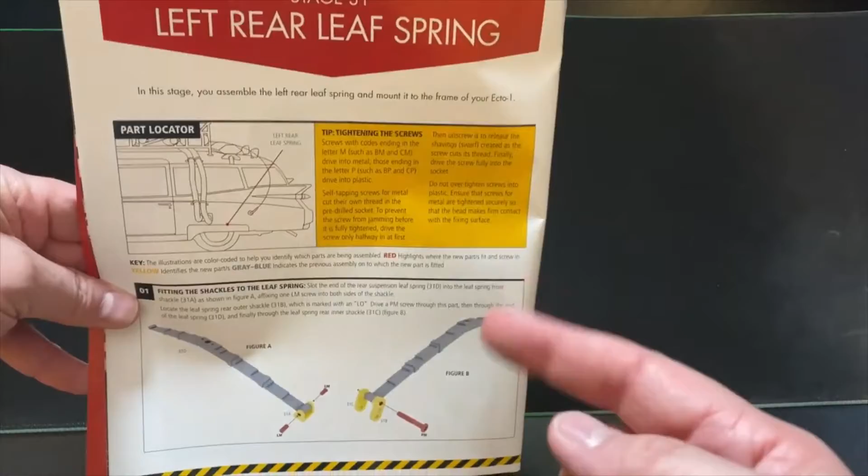We have our parts kit right there, and we are going to be working with stage 31, the left rear leaf spring. This leaf spring is metal, so that's really cool, it has some weight to it. I can't wait to see how much this whole car actually weighs - it's incredible how much so far.

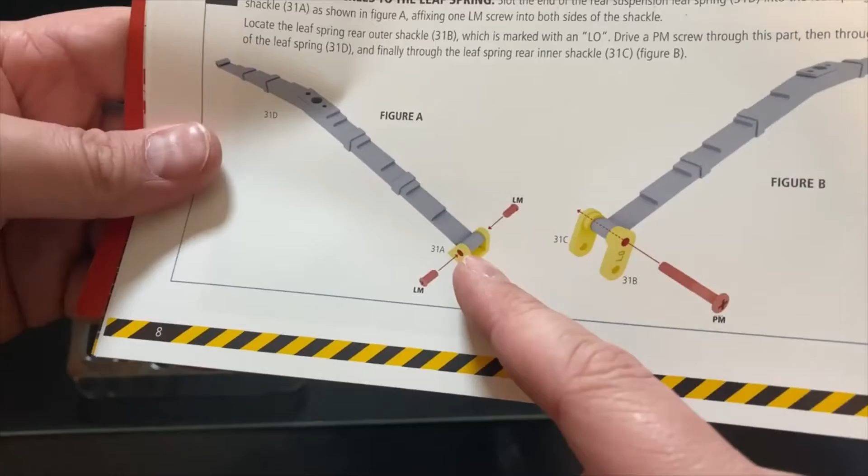So our rear leaf spring, we're going to start off right here with our shackles. We have the shackle, and then you're going to use LM to push through, and then on the opposite side it's going to be a PM screw. So we're going to get these shackles on real quick and show you the results.

All right guys, there we go. We have the shackles attached to the leaf spring itself right here. We have this side and this side all done. This is one long bolt that goes through here and kind of swivels a little bit, and then this side you have two. So that is done.

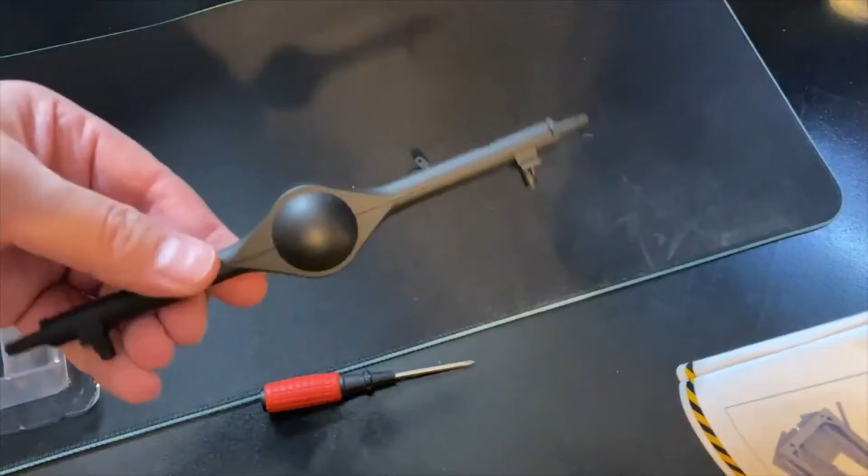We will move on to the next step, which is attaching the leaf springs to the rear axle itself. So we're going to take that and attach it to our axle, and we'll knock that out right now.

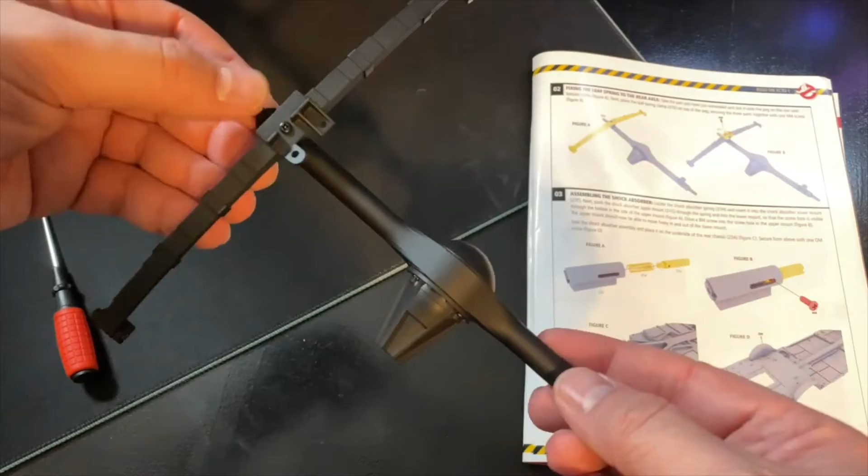All right guys, there we go. We have this attached to the axle itself. And there is a little bracket right here that goes on over top of your leaf spring and then gets screwed right on there with one NM screw. So that side is all done.

Now it looks like we are going to be assembling the shock absorber, the rear shock absorber. So we're going to do this real quick - take figure A, which is this piece right here, and then there's also a few springs and a plunger right there that we are going to attach with BM. Once that's done, attach it to the underneath of the car on this side, and we're going to attach it with QM, and we'll get that knocked out real quick.

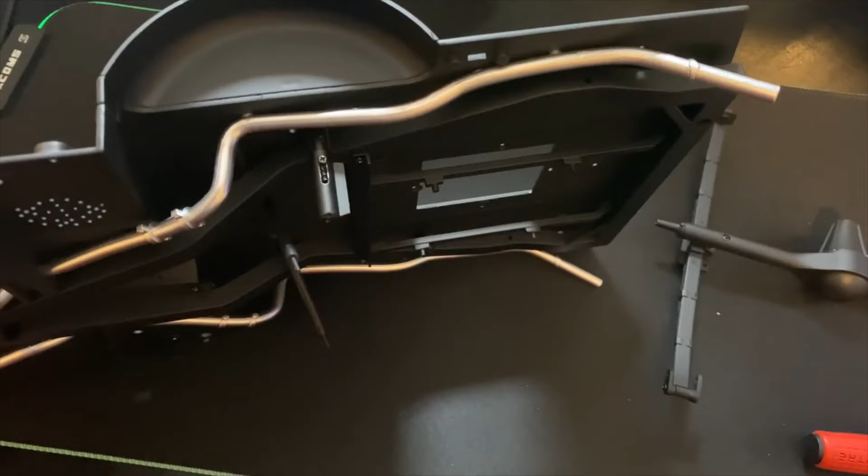All right guys, so I have our car on its side and our shock absorber is on right here, and there is one screw up top right here, if I can show you, right there. That's where your screw goes for that, and that is all done.

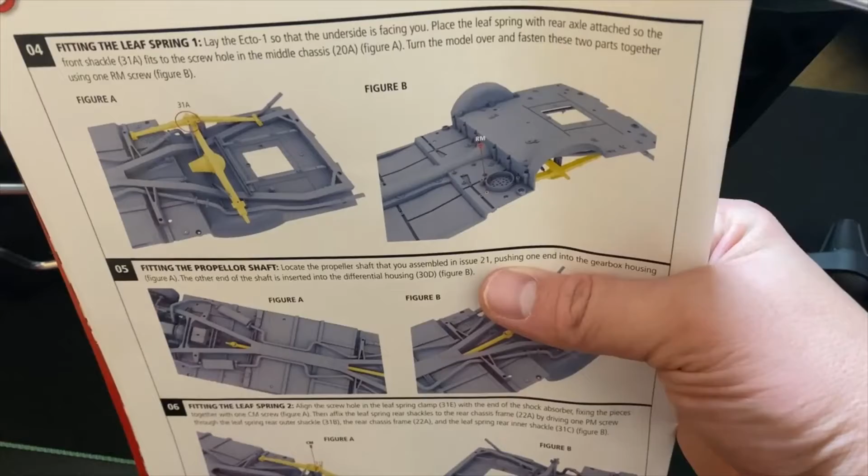Now that that is on, we're moving on to the next section, and it is going to be attaching the leaf spring itself to the actual car. So we're going to get it attached real quick, and then it looks like it is held on with an RM screw on one side, holding it down. Then down here, we are going to be attaching the propeller shaft.

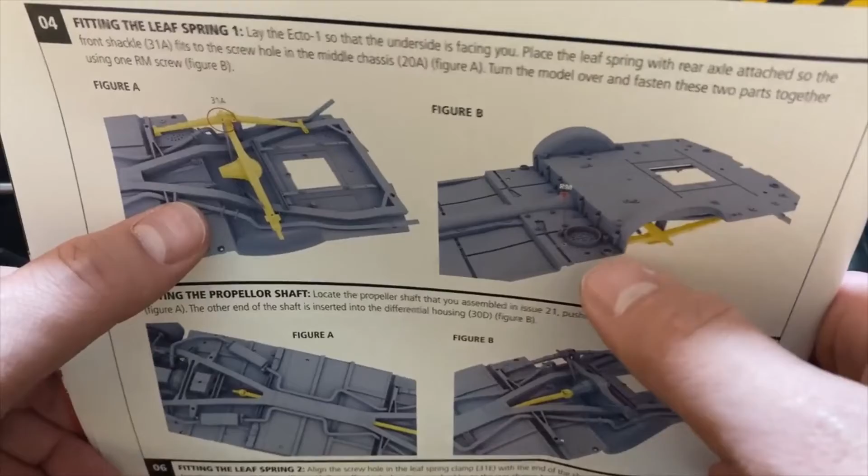So first off, let's get this rear axle attached to the car and go from there. All right guys, there we go.

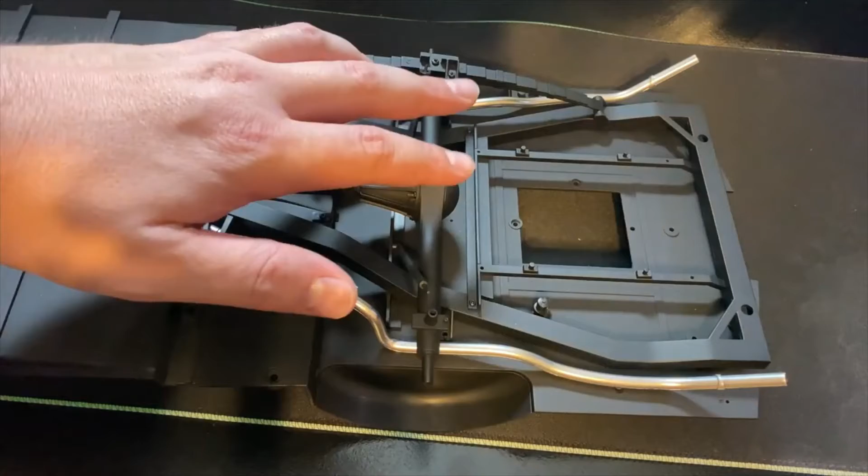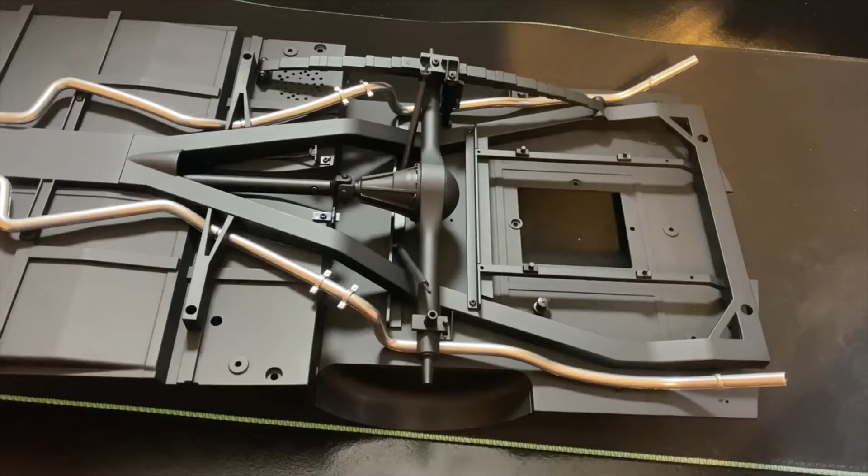We have our rear suspension attached to the car with our leaf spring. So I'll show you exactly what all we've done, because it seems like we've done a lot, since I didn't want to mess with it. Starting up here, you have one screw that holds the shock absorber to the actual suspension itself - that piece. Then underneath you have PM, which holds the shackle from the leaf spring. So we have that attached right here and here.

And then you are also going to be fitting in your drive shaft from a few boxes back. You're finally using your drive shaft, so it's going to go in, and you may need to adjust it a little bit. What I did was I pulled it out, slid it in, and it fit perfect.

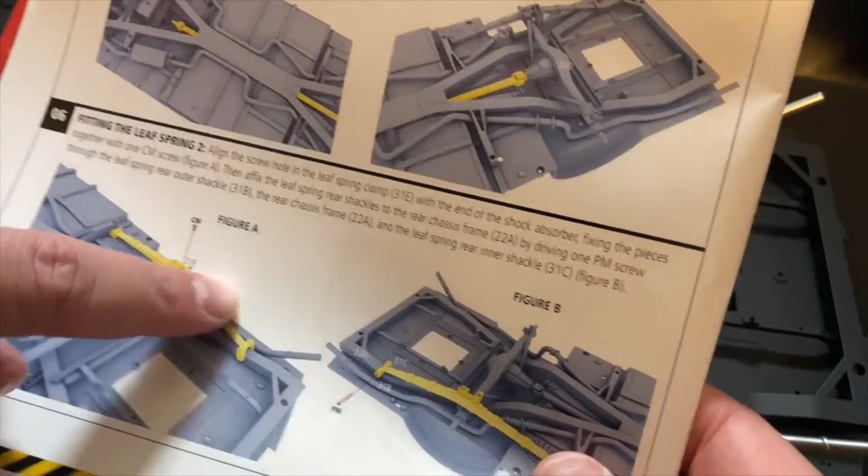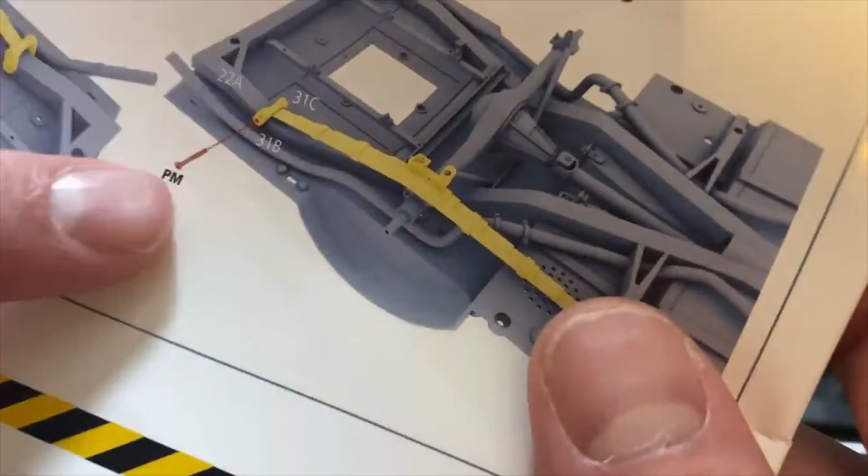That slides all the way up through this channel to the front, and it plugs right into the transmission. Now that that is on, you have your screw for your shock absorber, and then one long screw that goes through here. I lifted up on the exhaust a little bit to get it underneath there to line it up. That one is a PM screw, and then that is done.

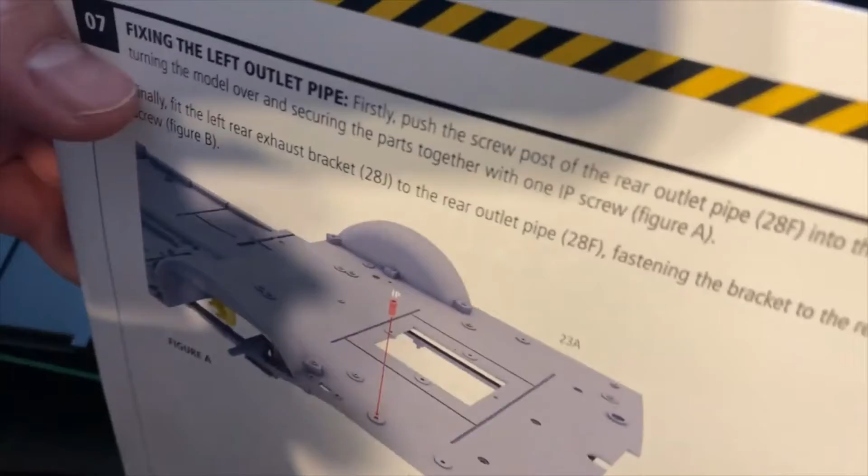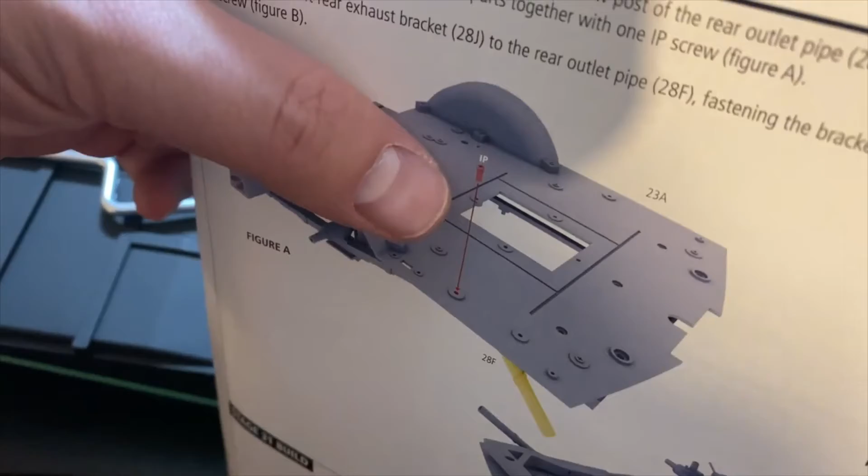Now we have one more piece, and it is going to be fixing the left outlet pipe, which is a little flimsy back here. To fix that, you have IP that gets screwed down, and it holds this piece left over from when we did our exhaust. This piece is going to be screwed in with BM holding it down, but from the other side going down, it's IP, and that holds everything together on your exhaust. We're going to do that right now.

All right guys, there we go. We have everything attached. We have our bracket attached right here, all the parts on for the leaf spring and the rear axle, as well as our little shock absorber. That is done, and that means box 31 is completed. We are all done.

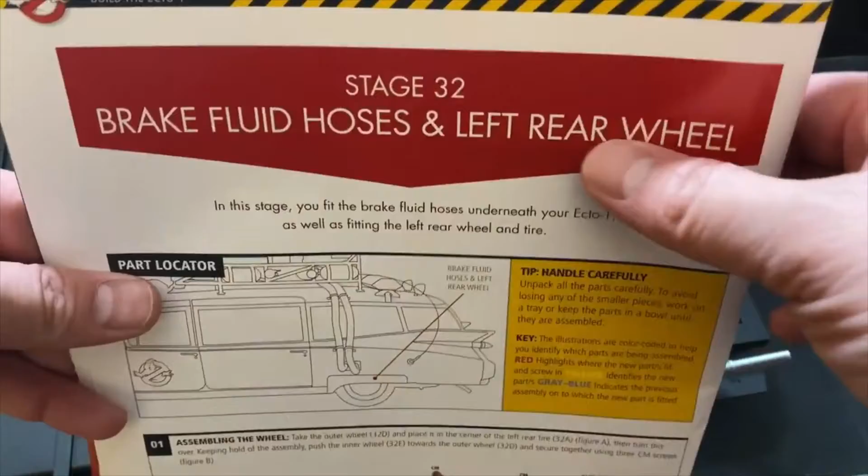So now we can finally get into box 32. This is going to be brake fluid hoses and the left rear wheel, and we will get this going right now.

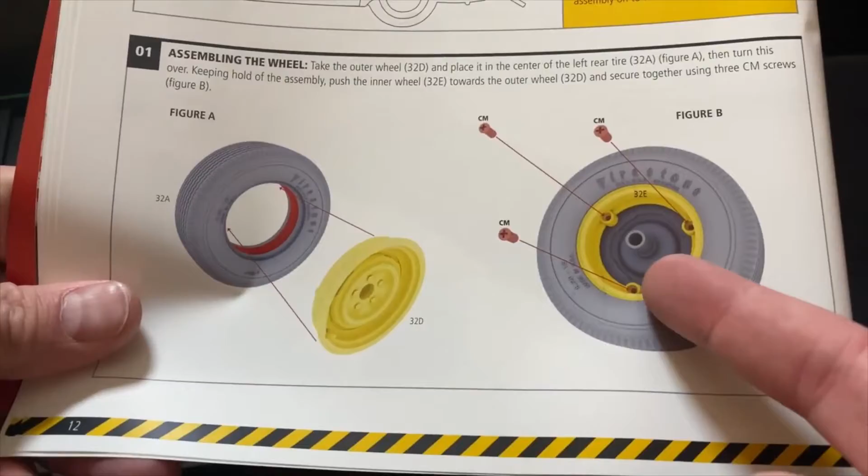Again, like our other videos, you've seen us put together wheels. Three screws, make sure your holes are lined up on both sides. Kind of compress the rubber on the tire a little bit to get them in, and then you are done. So we're going to knock this out right now and get our tire put together.

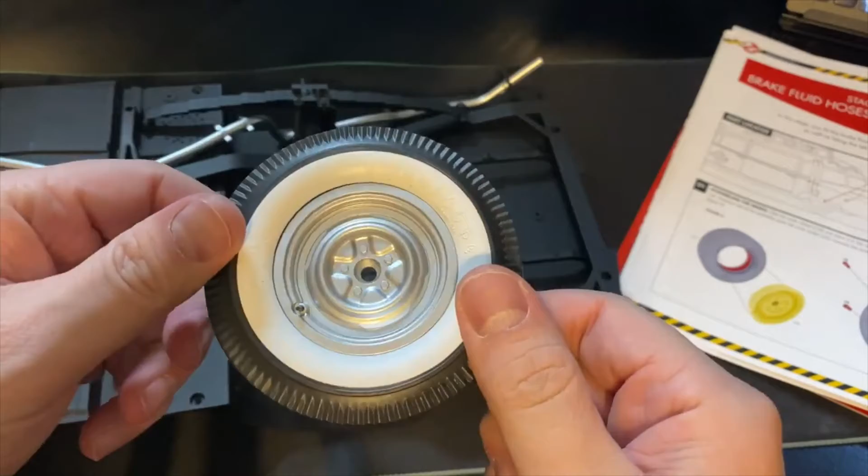All right guys, there we go. We have our tire put together, two sides, back and front right here, and that is all done.

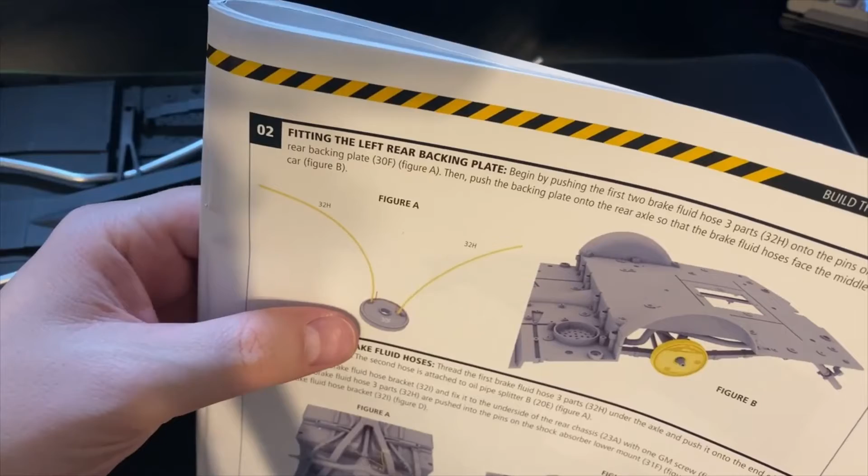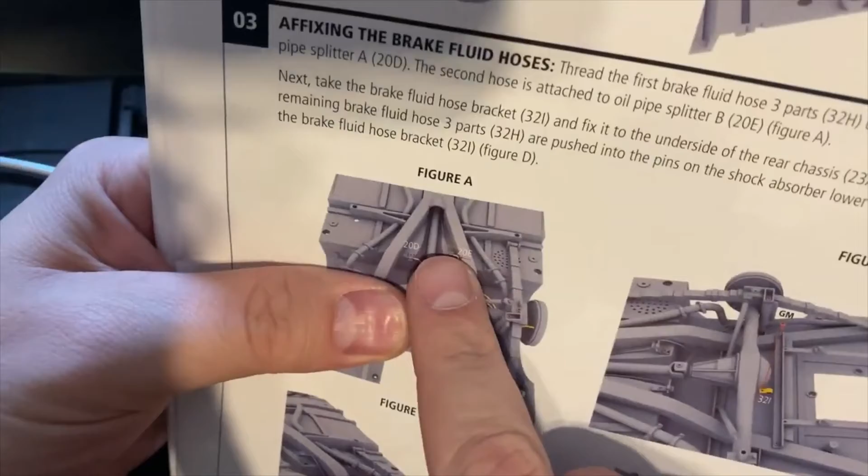All that is completed. Now it looks like we are attaching the left rear backing plate, which is the brake assembly for the rear brakes. There are two little pieces that stick out, little pins, and you're going to attach two hoses to that, and then attach it right to the car. Once that's attached, down here you are going to attach two hoses from those onto the brake lines right there, and that is going to be completed.

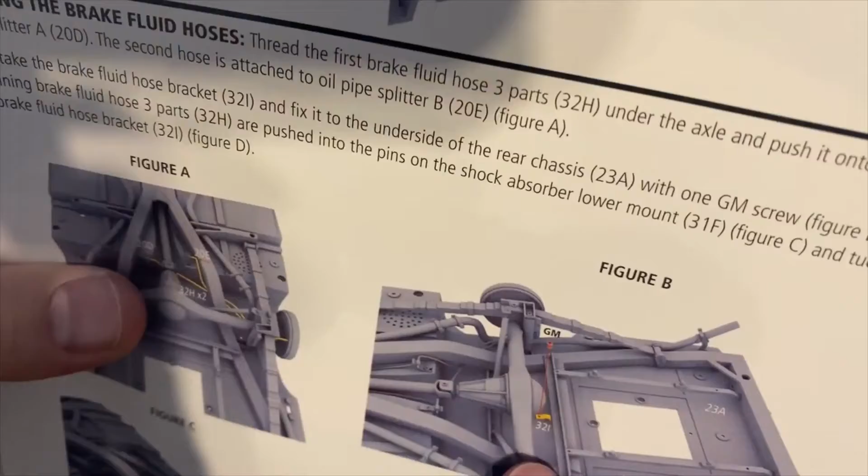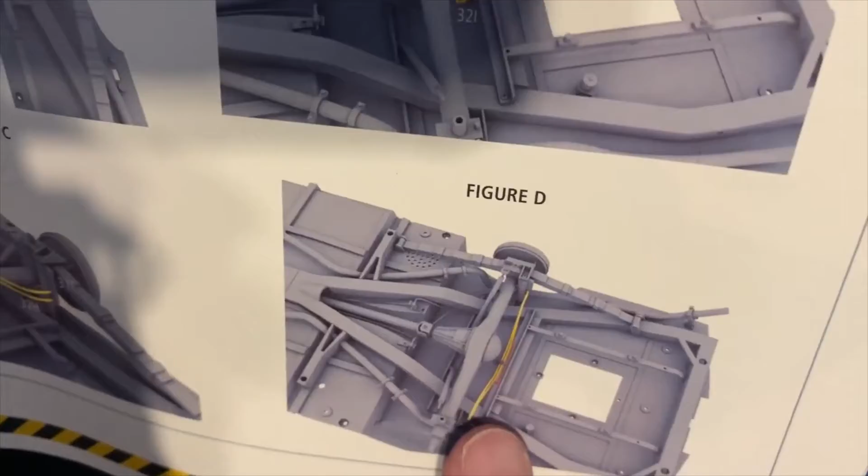It looks like there's also a little bracket right here that we're going to attach with GM. Then down here there are more hoses that go down and around to the shock absorber itself, and then to the other side. So we are going to get all this hooked together and show you the end result. So far, so good, it's looking really nice.

All right guys, so there we go. We have our brakes on, and they just kind of sit there. You also have two hoses that go from the top to the bottom, and those route around underneath the frame to here and over here.

Also, from the shock absorber down here, you have two hoses that go all the way down. There's a little clamper here that you have to put on, and that is held on by GM. GM, and then going all the way up, those go under and just hang out there until we move on. So all the hoses so far for the left side rear are done. Now we will move on to the next part.

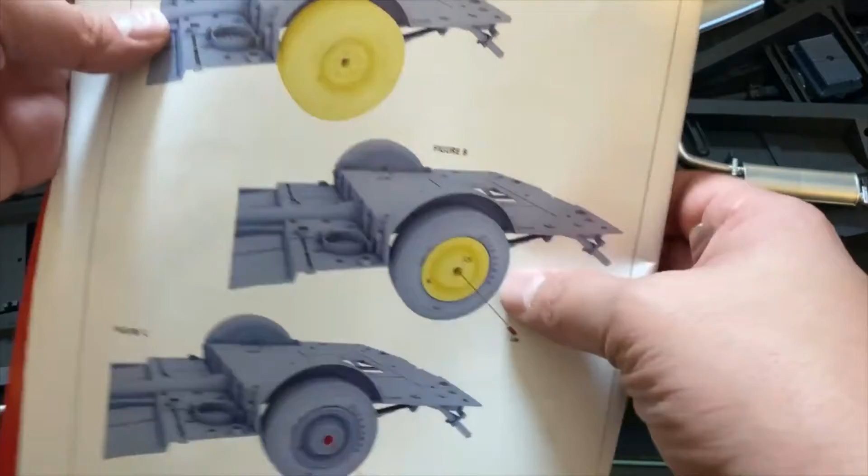All right, now that that is all done, moving on, we are securing the wheel. Our wheel that we did earlier is held on by LM, and then don't forget to put your hubcap and the center cap covering everything. We're going to get that on right now.

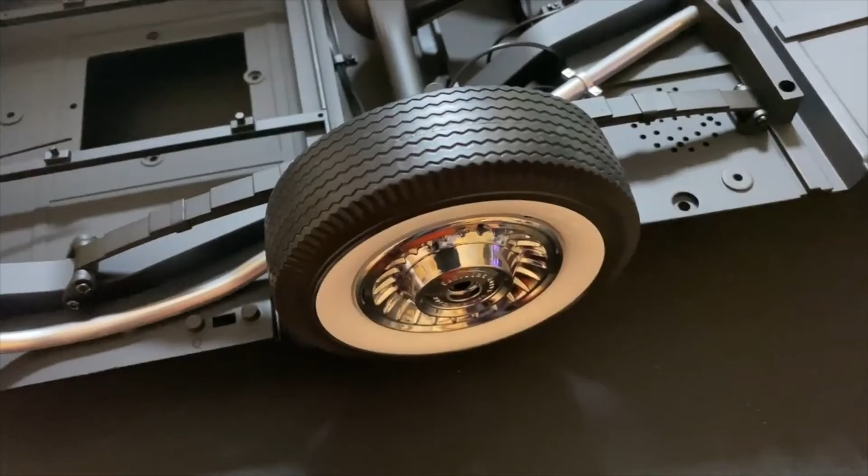All right guys, there we go. We have the wheel attached and all of our hoses are hooked up. Good to go here, and we also have our next brake assembly all hooked up with hoses, ready to go for the next side.

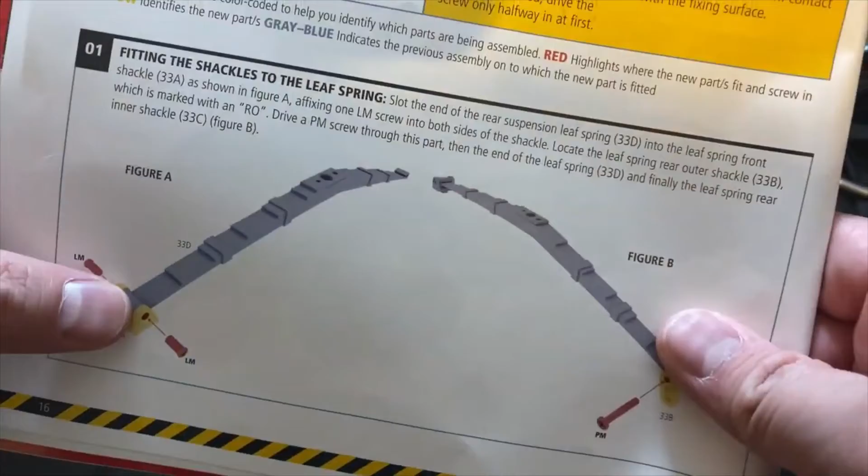Next we have stage 33, which is the right rear leaf spring. Just like before, we have our shackles that we must attach on both sides, and we're going to get this done right now and move on to the next part.

All right guys, just like before, we have our shackles attached right here on front and back. That is all done. Now we will move on to the shock absorber.

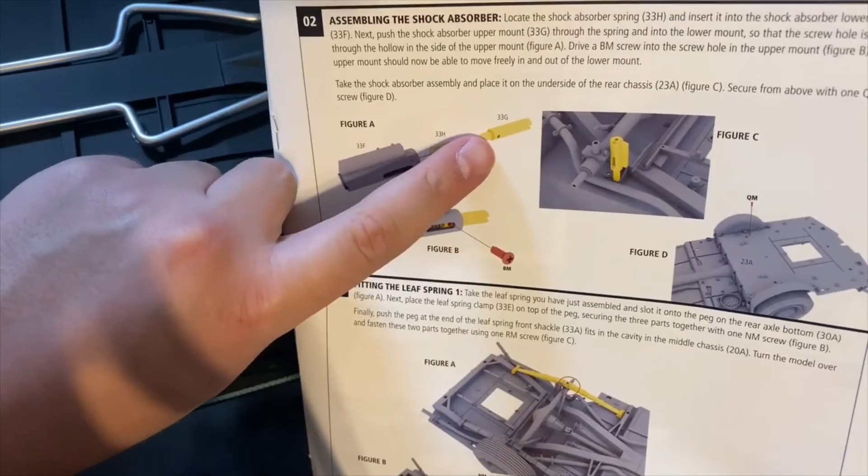Putting this together, you have your three parts: your spring, your plastic piece, and your plunger. Get all that on, it's held by BM, and then you're going to attach it to the frame or to the body itself with QM. Get that all done right now.

All right guys, there we go. We have the suspension on for the right side, and it is looking good. We have our shackles attached, we have the leaf spring attached, everything's on, that's all done. We also have our bracket, just like the other side.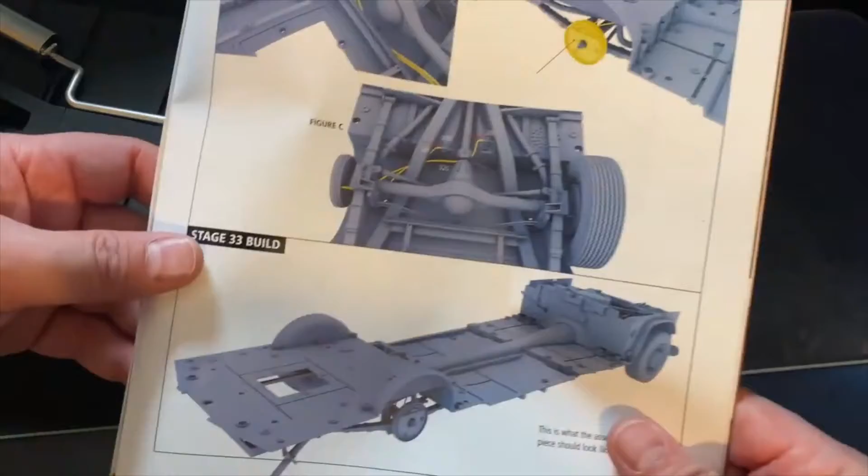It's all on. Now we are moving on to attaching all of these hoses, all the brake lines, to the various shock absorbers and the brakes itself. All these get hooked up just like you did on the other side, and then we are done with this issue. So let's get all these brake lines hooked up, and there is a lot to hook up.

Yeah, all in here, and we'll get it going. Show you what it looks like. All right guys, there we go. We have all of our hoses hooked up from down here, going across all the way up to over here. All done. That means this issue is completed. Issue 33 is all done.

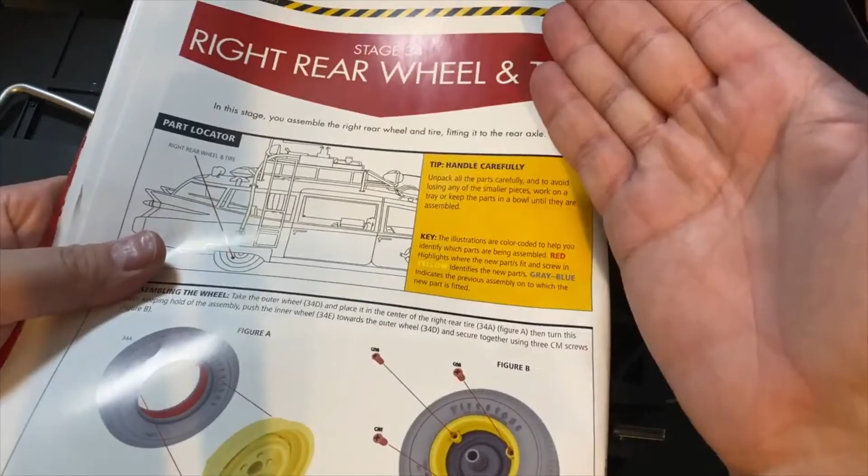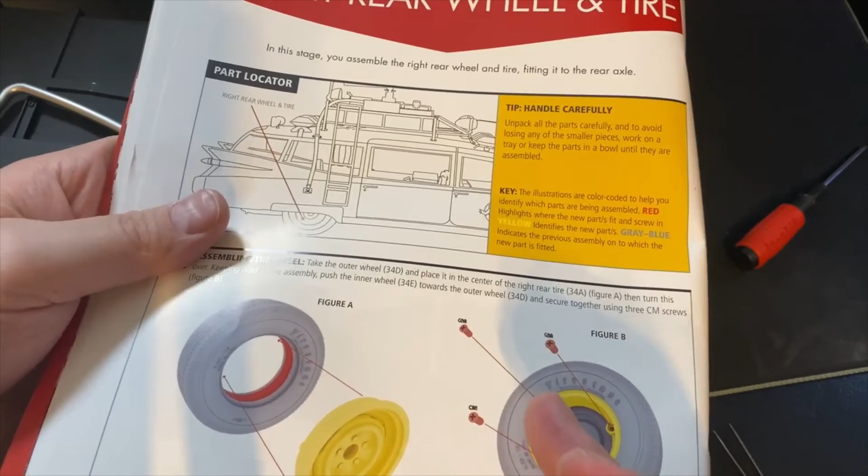Now, last but not least, issue 34, the right rear wheel and tire. And we will knock this out right here, simple like we did before on all 3. CM screws, push everything together, knock it out, and we'll get this going.

All right guys, there we go. We have our tire attached. We have our entire rear suspension completed. We now have 4 tires on our Ecto 1, a full suspension, exhaust, and motor in the car, and it looks awesome. It does, let's get a profile of this thing sitting on its 4 tires.

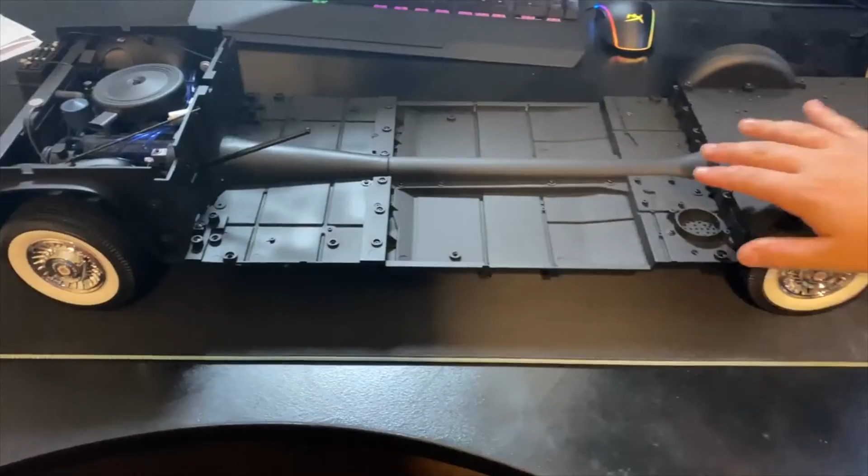All right guys, there you go. There is our Ecto 1 on 4 tires, 1, 2, 3, 4. Looking good. And that is done, that means this issue is completed.

All right guys, we are done with issue 10 of our Ghostbusters build, and I am happy with the way that this thing turned out. We now have 4 wheels, 4 tires on our Ecto 1, and it's great so far. What do you think of it so far? It's pretty cool, it's detailed. My favorite part is the engine. The engine is nice, I like it.

It's amazing, this car is so much fun to build. I can't wait to get into the next parts because I think we have to start building the interior at some point. I don't know when we start getting the body. I want to say it's going to be later on because there's still a lot that has to be done. So think about it, the engine's done, the frame's done, all the suspension parts, the exhaust, everything's done. So it's looking good.

And you know, we keep adding on to our binder over there, we keep adding a lot more parts. And it's just great, I'm so happy, I have no words to explain it. So yeah, 31 through 34, issue 10 in the binder, all done.